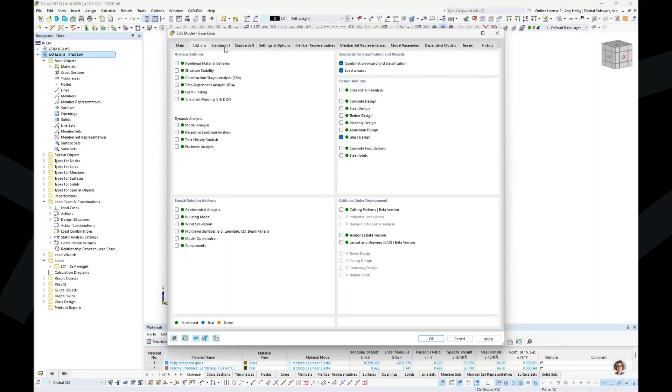Looking at our third tab here, this is where we define the standards. You'll notice the glass design is set to the ASTM E1300. We also have the German DIN standard available as well. And if you wanted to do a code-independent design, which just looks at stresses and compares them to materials, that is also possible within this add-on.

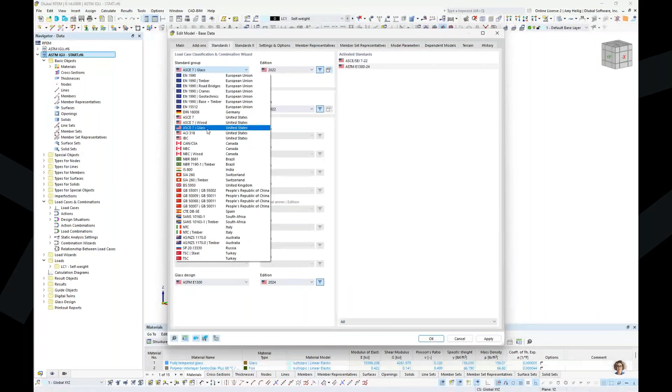When we have the ASTM selected, it is required that we generate our load combinations according to ASCE 7 glass. This is identical to ASCE 7, but we also want to specify the load duration factor for each load case, which is required in order to carry out the design according to the ASTM. That will make more sense once we get to the loading within our example today.

Now that this information has been defined, we are brought into the main program RFEM 6. You can see I have my graphical window here at the center. I have modified my drawing grid in the vertical direction, and every drawing grid point here is spaced at 1 foot. We can always right click down at the bottom to modify our grid settings.

I want to begin immediately by drawing a new surface. So we will specify a new rectangular surface up here within my quick tools. And we do need to assign a thickness to this surface, so we create a new definition type here.

The initial dropdown that's presented to me includes the glass composition. This particular thickness type is only available because I have activated the glass design add-on; without that add-on, I would not have access to this thickness. When I select this, I now will visit my second tab here where we can build up the various layers of our glass panel.

Now, to begin, I am going to start off with laminated glass. So we will start by selecting our material from our drop-down box here.

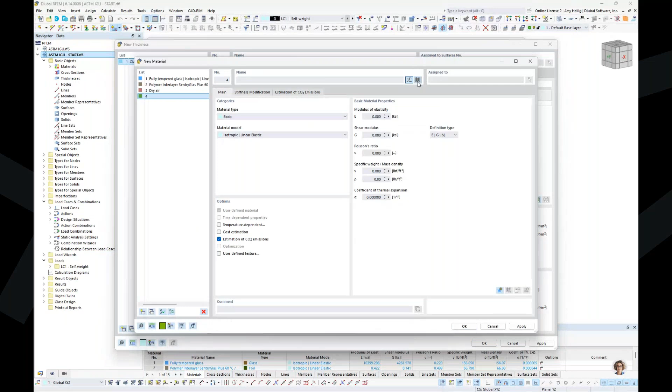Now, in this case, I already have the materials defined, but we could always visit our material library if we didn't have any materials in our program yet. Within the material library, we could set the filters over on the left to the United States. We can select here the material type, which is set to glass. And then you can see under the ASTM standard, we have 3 different glass options.

Today we'll be utilizing the fully tempered glass. In addition to this, we also have the foil types under the United States with the manufacturer SentryGlas, which again we will also be utilizing for our interlayer today.

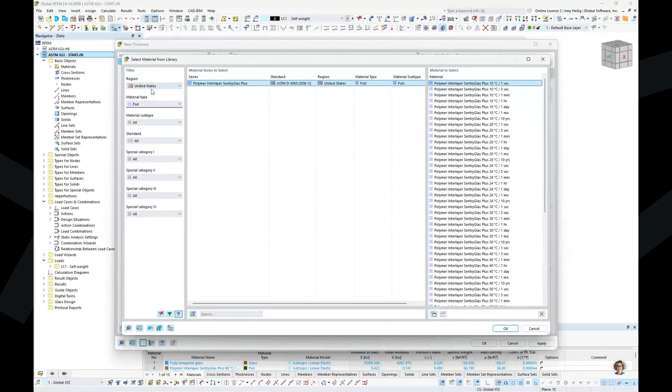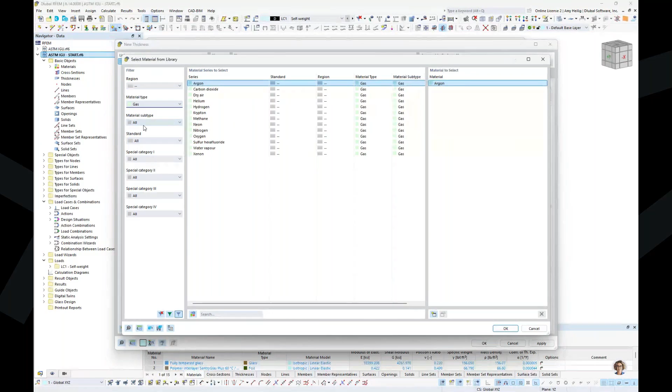If you do go ahead and clear out the region here, there are some additional options when it comes to foils that you can see selected from this list here. We will also utilize the code independent gas material type once we do get into the insulated glass panel. For this, you can see argon's available, dry air.

So likely one of these materials will already exist within our material database. But if for any reason you don't see your material there, you can always select an existing material and set this as user defined to tweak those modifications to the material values themselves.

So as mentioned, we already have these materials defined here in my model today. So for my first layer, I am going to select here the fully tempered glass, and the thickness is going to be set at 1/4 inch. I can input this in either as a fraction or a decimal.

The edge finishing is also selected here, so this is either clean cut, seamed, or polished edges. We'll go ahead and choose polished. This does influence the capacity of our glass when it does come to the ASTM design checks, so that's just something to keep in mind. That's why we are setting the edge finishing here.

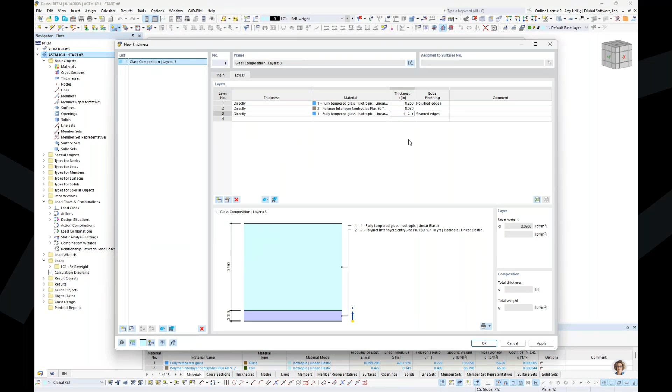The second layer is going to be that interlayer with a very small thickness of 0.03. And the final layer will be glass, yet again, of 1/4 inch and polished edges.

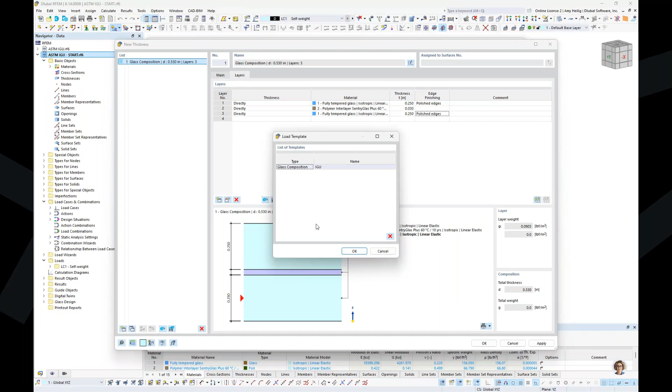Now, once we have these layers set and you're working with these quite often, you can always save them to your template library. So you can go ahead and give it a name, and then for every future RFEM model, you can have your templates available here so that you're not defining these layers each time. In this case, I only have one template defined, but you could, of course, define as many as you'd like there. That will just be a nice time saver if you're working with these same layers over and over.

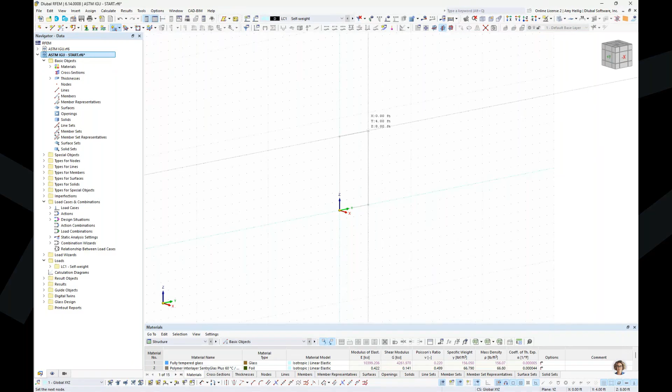So once we have defined this thickness, it is assigned to this surface, and then we can graphically draw this particular surface. So I'm going to snap at the origin point here, and I'm going to click on my second point, a width of 4 feet and a height of 8 feet.

Now, one other thing to pay careful attention to when it comes to the thickness is that when we look at the local z-axis here, we want to ensure that this is oriented properly with my surface back in the global model. In this case, this is a pretty symmetric layout, so it really won't matter in which direction this is oriented, but for unsymmetric compositions of glass, we would want to pay careful attention to that.

So now that this surface has been drawn, we want to apply some additional supports. To begin, I'm going to apply line supports to the boundary edges here of my glass panel. There are many different ways to work in the program. I can select here a new line support, or we can go ahead and apply it through the navigator on the left under types for lines. You'll see that expanded here. Utilizing my quick tools up at the top, I will create a new definition type.

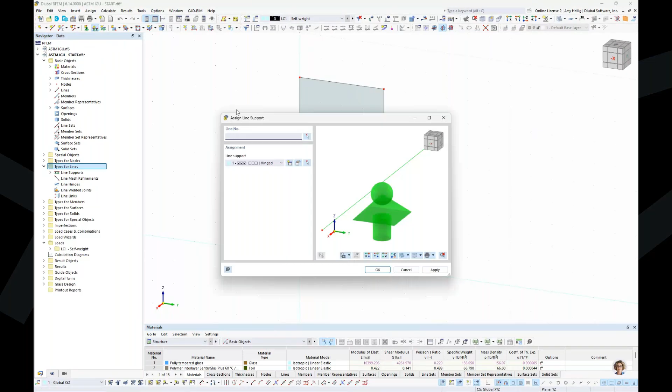And the first line support here that I want to define will be supported in the out of plane X direction only for translation. But I don't want a fully fixed support. I don't want it fully released, but somewhere in between. So we'll go ahead and specify a spring constant of 40 kips per square foot.

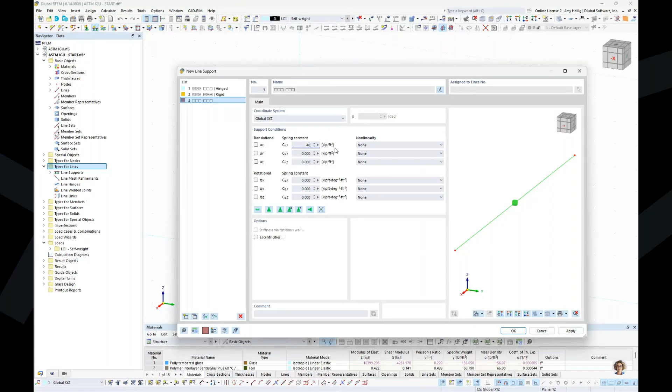I click OK, and then once I am back in this initial dialog box, I can graphically select all of my boundary line elements for this surface, and I can go ahead and click OK. So you'll notice that the line supports are now shown. If we right click, we can also take advantage of this slider to decrease or increase the size. That's true for all support options within RFEM.

We also want to apply a couple nodal supports at the base of this panel. So we'll begin first with the nodal support on the left by creating here a new nodal support definition.

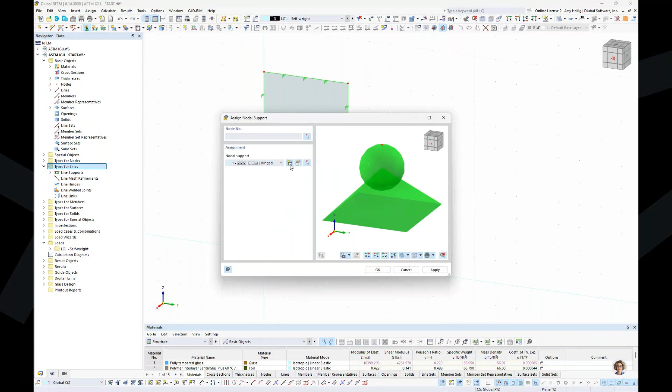I create a new definition type, and for this first entry, I want to support it in the global Y and Z directions only. So I'll go ahead and turn off the translation in the X and also the rotation here. I click OK, and then I can graphically select node number 1.

When I click OK, I have the ability to hit apply within this dialog box. So we see that nodal support applied to node number 1, but I still remain in this dialog box where I can create a second definition here.

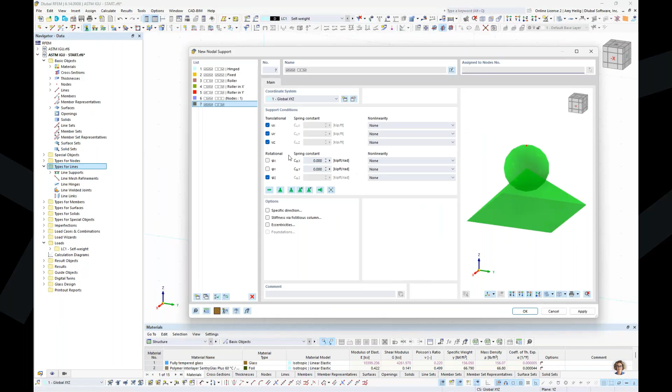And for my second nodal support on the right-hand side, this will just be supported in the vertical Z direction only. All other degrees of freedom will be released. I click OK, I'm going to graphically select node number 2, and click OK through these dialog boxes, and that second nodal support is modeled here.

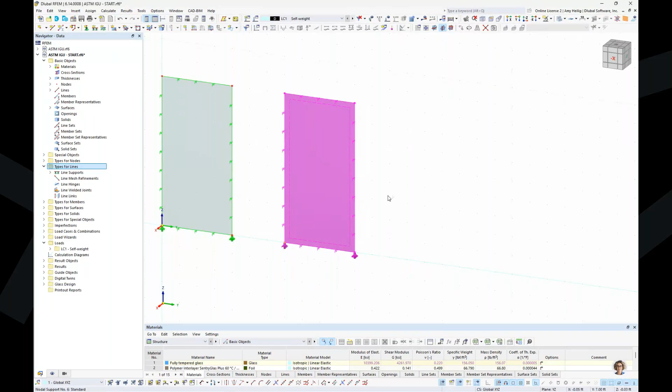So the first surface for our laminated glass panel is complete. I'm going to use my selection box to highlight all elements graphically. And when I hold down my control key on my keyboard, I have the ability to quickly make a copy for my second surface, and then do the exact same thing again a third time for my final glass panel.

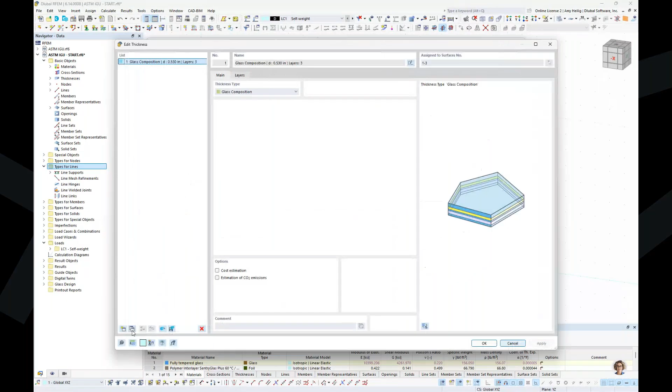Now, as we have it modeled here, all three of these panels are identical. But what we would like to do is assign different thicknesses for panels 2 and 3. So I can double click on panel 2, and again that original thickness is currently assigned. Let's go in and edit this thickness where I can make a copy of the existing laminated glass layers here.

And you might be wondering, why am I making an exact copy? This will make more sense as we move through our example today, but more or less it is going to be exactly the same as panel 1. I need to select my second thickness that I've just defined, and I click OK.

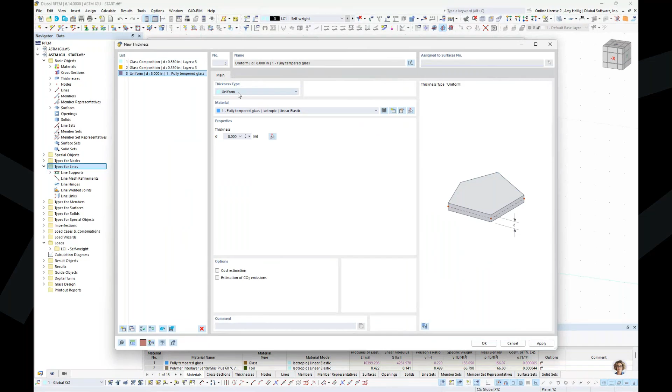We're going to do the same thing for panel number 3, where we're going to go in and edit the thickness, but this time I'm going to create a new definition. We're going to select the thickness type from the dropdown to glass composition, and under my layers tab, this is where we want to create the layers for our insulated glass unit.

So I'm going to select here my glass material. The thickness will yet again be 0.25 inches, or 1/4 inch. We will select polished edges.

The second layer is going to be that dry air material that I've already populated within the RFEM model. So this thickness is going to be 0.5 inches, and then we need to place another glass layer on the other side of our gas. This will be 0.25 inches, polished edges.

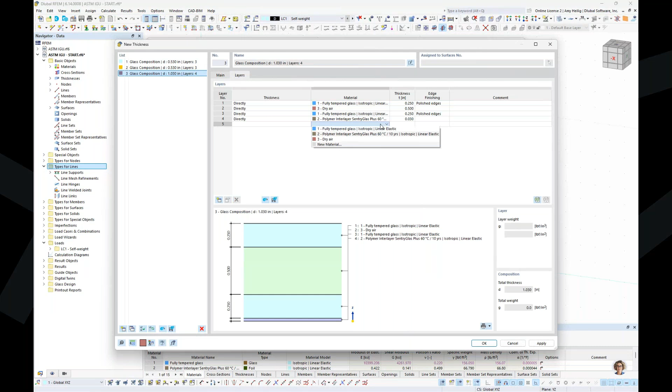And we have the ability with the layers here to not only define laminated or insulated, but also to combine the two. That's what I'm going to do for this last thickness as well, to select my interlayer at 0.03 inches, and my final and fifth layer will be glass once again at 0.25 inches with polished edges.

So you can see how it will be advantageous to take advantage of your templates and save them to your library in order to not define this over and over again. Now, this would be an instance too where we want to pay careful attention to the local Z axis since we have an unsymmetric layout here.

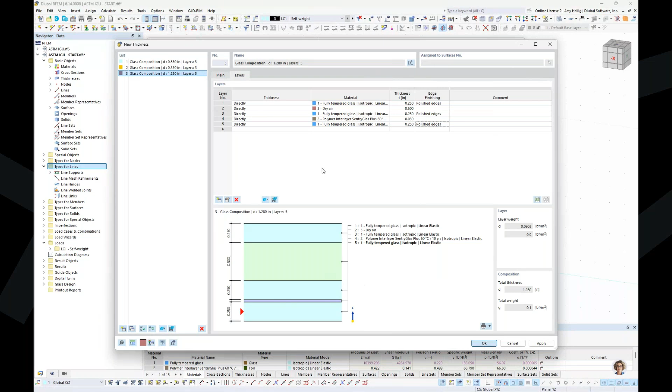So now that we have defined this third thickness type, we need to ensure that it is selected within our dropdown and assigned to panel number 3. So the modeling is essentially done for these three different types.

Remember, laminated and insulated. So I'm going to go back to the navigator on the left, and I'm going to right click to collapse all these folders. If you find all the different options a little overwhelming, you can always collapse these folders at once, which makes it a bit easier to navigate.

We'll start off with the glass design folder. Again, this is only available because that glass design add-on is enabled. And under this folder, we have the different glass composition models. So the glass compositions, I'll go ahead and edit these, are created for our glass surfaces.

A separate composition is always created for different thicknesses or different geometries. So if I had left the same thickness defined for all three of these panels and all three geometries identical, then I would see only one composition. But in this case, remember, I have three different thicknesses defined, even though the geometry is the same. So therefore, I have three different composition models.

Now we'll go through this in detail. Starting off with the first composition here assigned to our first surface, we want to set the modeling type to a surface model. We're going to get into more detail with this in just a minute, but this is also where we are going to set either coupled or uncoupled for our shear coupling between those layers.

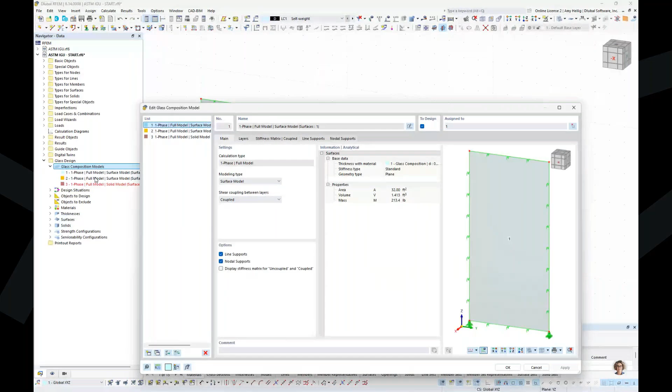The second composition is assigned to panel number 2 here. Remember, this is identical to the first one, but for this case, I'm going to set the modeling type to a solid model, and I'll go ahead and click apply. What we will see here is that for the second composition, the reason why it turned red is because the program says, hey, wait a minute, we need to go ahead and orient the local axes of the lines if we're going to generate these solid elements. So we have a quick option here just to tell the program to go ahead and do so.

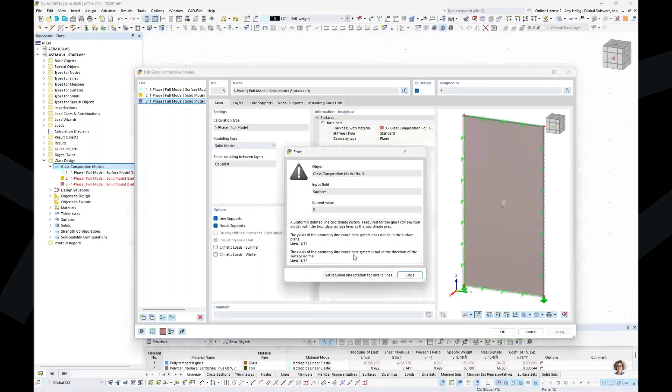Now the third composition here is going to be assigned to our third panel, and this will also be a solid model. So for any one of these particular solid models, we'll ensure that the rotation is set. We should be able to click OK, and then now we see all three of those compositions look okay.

So let us talk a little bit more about the surface versus solid model here, as well as shear coupling. And we'll go ahead and refer back to the PowerPoint.

With the surface model, this essentially is a 2D object in RFEM, which is an FEA program. We're going to keep that glass panel as a two-dimensional element, but we have two different options here when it comes to shear coupling. The first is a 2D element, a surface model with rigid shear coupling. This is essentially where all of our layers are rigidly connected together, so therefore we're going to get rigid shear transfer between each one of those layers.

Now the alternative option with a 2D surface model is to have essentially an uncoupled option where we have free shear coupling. The layers are allowed to slide independently, and we're not going to have any shear transfer between those glass panels or those glass surfaces to the interlayer surfaces. So those are the two different options here when it comes to that surface model, either fully rigid or fully released.

Now alternatively we have the 3D solid model. So we're now introducing this third dimension, this solid object, into this FEA program for our glass structure. And for this, we will actually consider the true shear coupling between each layer. The interlayer, such as our foil or our resin, the material properties will be accurately considered for accurate shear transfer between the glass to the foil or resin, and then also to the glass as well.

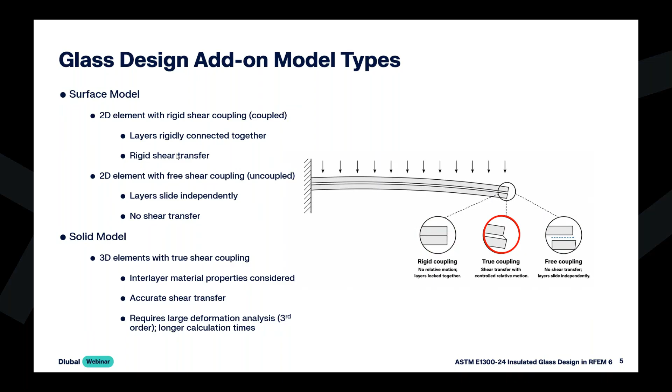And we begin with first single layer glass. So this is obviously the simplest composition, we just have a single glass layer. And for this, in most cases, probably a 2D surface would be completely sufficient because we don't really have to worry about that shear coupling with only one layer. However, if we are starting to see the thickness over length ratio greater than 0.05, then that plate theory is no longer valid and we need to move to solid elements, so three-dimensional objects here.

So therefore, solids are recommended for thick plates. And this is really true for all glass structure types, whether it's single layer or laminated. We would recommend moving to a solid if that thickness starts to really increase in comparison to the length of our panel. The second type is laminated glass, so this is essentially where we have two or more glass panes with this interlayer, this foil or resin. And for this, either 2D or 3D is possible.

Keep in mind with the 2D model, as we discussed on the previous slide, it is either fully rigid shear coupling or fully released. It certainly could be possible that you run this 2D surface model without shear coupling for long-term loads where the shear resistance of that interlayer should not be considered.

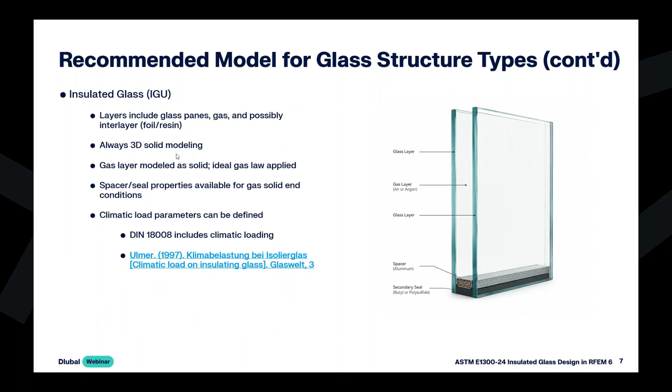Okay, so what we'll do now is go back into RFEM to, again, take a little bit of a detailed look at these compositions. Now that we understand the surface versus solid model in a little bit more detail, we're looking at this composition number 1 here for our laminated glass that is set to a surface model, so a two-dimensional object.

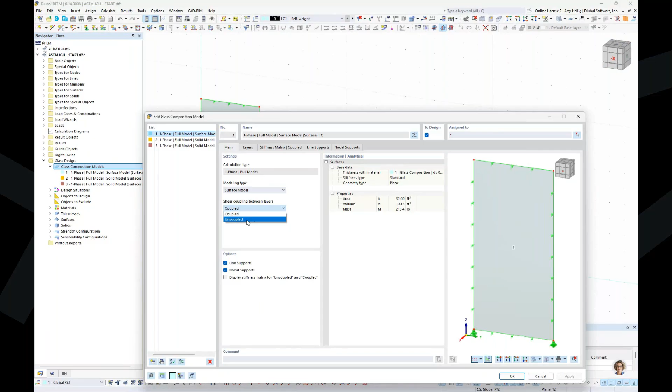We can select here whether it is rigid shear coupling or completely uncoupled and free. For this one, I'll go ahead and leave this as coupled.

The second tab just reiterates the layers that I've already defined within the thickness. Not too much to discuss here, but you will know that each layer has its own stiffness properties. So we're going to utilize the laminate theory to then calculate the global stiffness matrix here of the panel, the global panel itself, back in RFEM.

This is really powerful in the sense that the program's automatically considering all of those layers. We can also display here, in full transparency, what that stiffness matrix is, whether it's coupled or uncoupled.

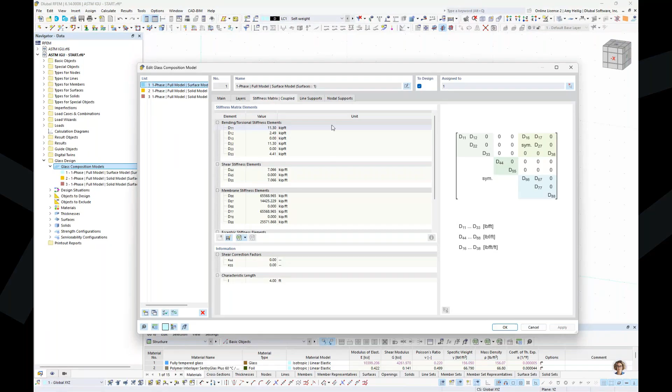Now, these supports are also given to us here. So we have our line supports, again just reiterating that those out of plane line supports are applied at all four boundary edges, and also the nodal supports - we have our nodal support on the left and the nodal support on the right.

So now that we have covered this first composition, we'll move on to the second. Remember, this is identical to the first, but I did modify it here to a solid model because I thought it might be interesting. Let's compare a 2D surface option to a 3D solid to see how our results differ between the two.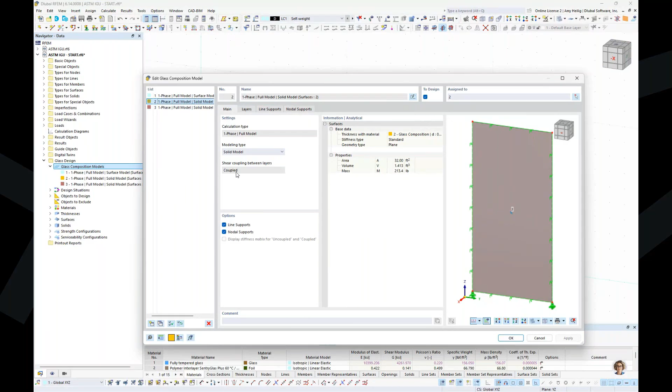When we have this set to a solid model, we do not set any shear coupling because this is automatically considered within the calculation itself according to third order analysis, where we will account for the true shear coupling between those layers. Under the second tab, again just reiterating those layers, but now that we have moved to a 3D solid, there is a difference here - we need to set what we call the reference plane.

You can see this dark line indicated here graphically is currently set to the top of layer number 1. I'm going to toggle this down to the bottom of layer number 3, and we see that update graphically.

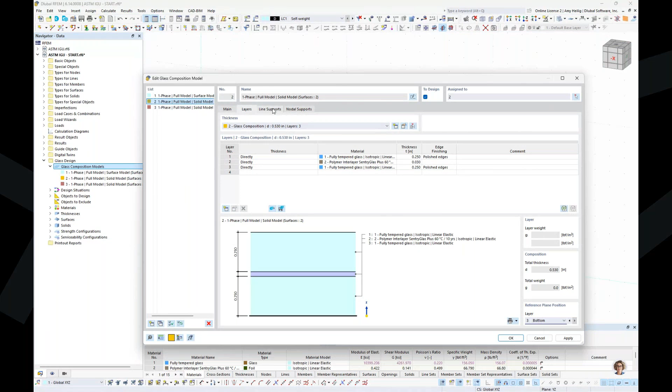The point of the reference plane is: where do we want, by default, all loads applied to this three-dimensional object? And where do we want all supports applied by default? We always have the ability to modify these placements, which we'll be doing in our example today. But we just need some reference point or reference plane in order to initially apply the loads and supports.

Under this third tab, line supports—again, just reiterating, these are line supports at the boundary edges. Because we've moved to the solid model, we now have a little more control over where we're placing these supports. For this line support, if I do absolutely nothing here, it's going to be applied to that reference plane, which is the bottom of layer number 3. So we'll go ahead and leave that for our line supports.

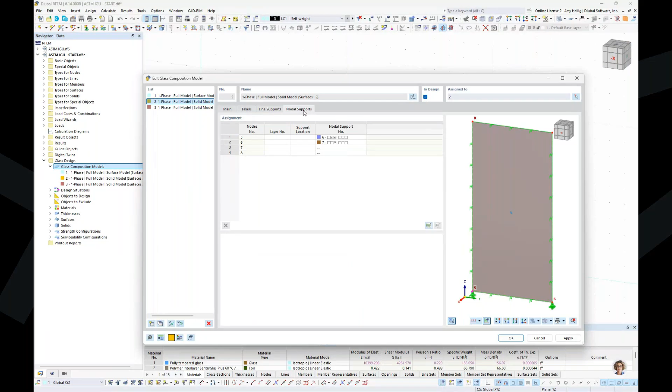Looking at the nodal supports, this is where I can toggle to the cross-section view. I'm going to tell the program to apply the nodal supports at layers 1 and 3—those are our glass layers—and we want to apply it at the middle. Now we see this update graphically: that nodal support right there in the middle of those 3D glass solids.

Same thing for my support on the right-hand side—we'll go ahead and toggle this to the middle. So you can see how we have a little more control over the support placement when we've moved to this three-dimensional object.

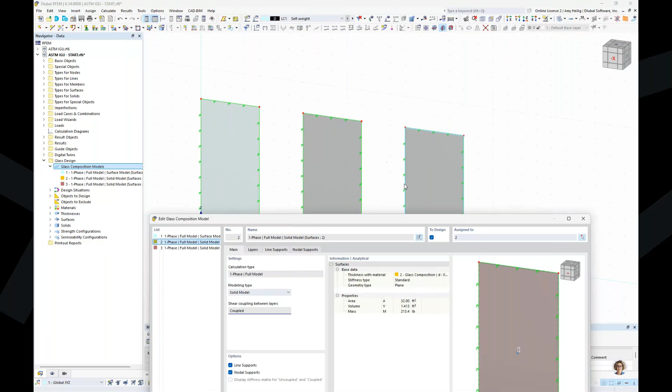We're now going to take a look at our third composition for our third panel. The program has automatically detected that this has a gas layer, so we have no choice here to choose a 2D surface element—only a solid model is available to me. And shear coupling, same thing: we can't choose any option here because true shear coupling will be considered within the calculation.

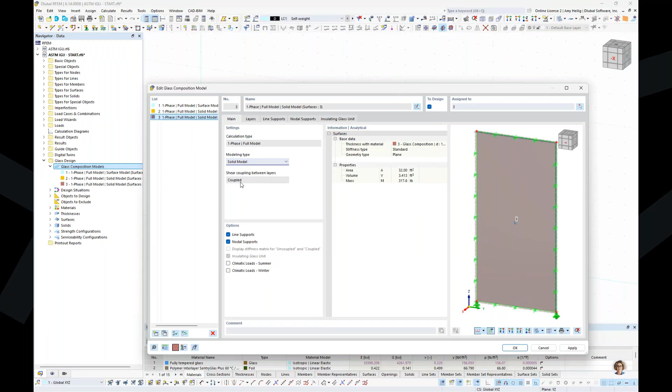Under the layers, I will toggle the reference plane here to the bottom of layer number 5. Looking at the line supports, I do want to make some adjustments. I'm looking at a cross-section view of our different layers, and within all of my line supports I'm going to apply this to layers 1, 3, and 5 at the middle. Now we see that line support adjusted directly to each one of those glass solids.

I'm going to do the same thing for each one of the boundary lines here by selecting layers 1, 3, and 5 within my dropdown, one more time for my final layer. A nice trick here: if I hit the down arrow key and F8, that will copy that input setting to all of my additional rows. So now those are all set to the middle for our glass layers.

The nodal supports, we want to make some modifications here. For my line supports, I'm going to go back and change this to only layers number 1 and 5, so I don't want to apply it to that middle layer. We'll make that modification here and for our last one. Good—so as you can see here, only the external glass solids.

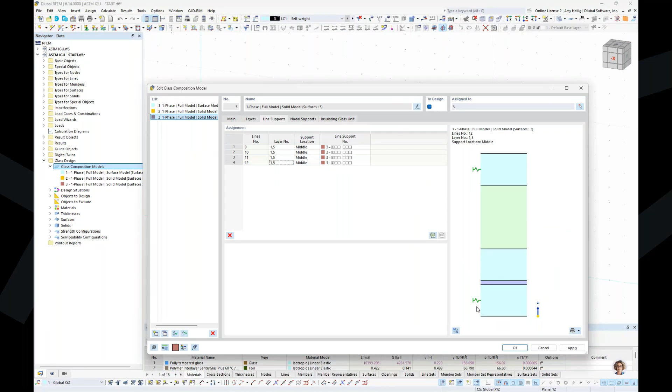Now, under the nodal support, this is where I do want to apply it to all three layers—1, 3, and 5—the support location will be the middle. We have only one other nodal support where I do want to apply it at all three locations. So there we go: two layers for our line support, and our nodal supports will be all three located in the middle. Now, the final tab here is specific to our insulated glass unit, and this is where we can specify our spacer.

You'll notice by default everything is deactivated here. So let us go to the PowerPoint to discuss this in more detail. This dialog box allows us to not activate any spacer.

Now, going back to our model today, we're going to go ahead and leave this deactivated. So again, we're going to apply this side support internally, and the program will create this very soft material. Everything will be done automatically. But if you want to modify that, you can always activate it here and define a thickness and material.

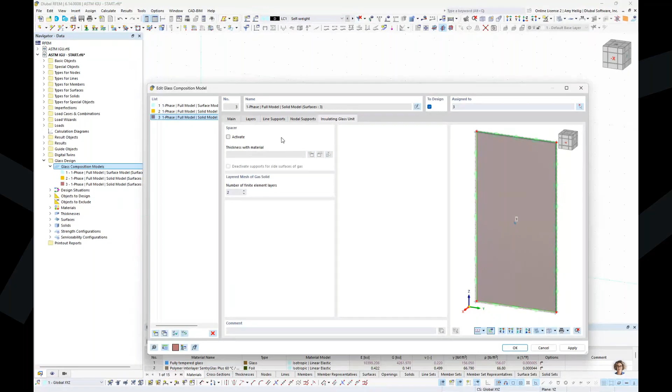So now that this information is defined for all three compositions, let us go back into RFEM to take a look at what the program has automatically modeled for us. When I expand my basic objects here, you'll notice under the solids, I have some automatically generated solids that include my glass, the gas, and also that inner layer.

If I expand out the surfaces, we can see all the surfaces that were also created automatically by the program, denoted by that purple color. When I'm looking graphically here at the model, these just still look like two-dimensional objects to me. So what we would want to do is take advantage of this button in the upper right-hand corner to display the glass composition model.

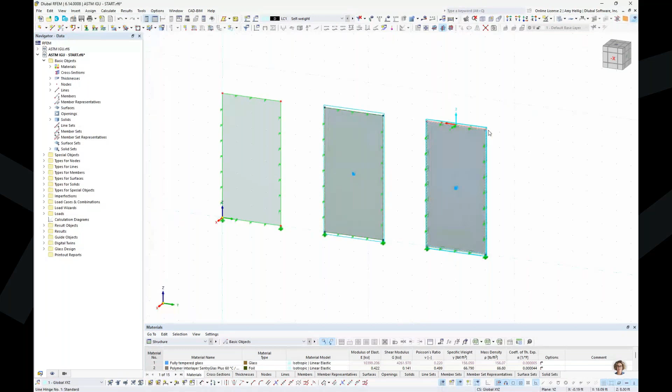This is also available here in our dropdown under the View tab at the very bottom, to display the glass composition model. When I activate this, you'll see that this first surface is again still a two-dimensional object, that's what we have set. But this second panel here is now solid elements. We can view this by zooming in quite a bit to see in more detail.

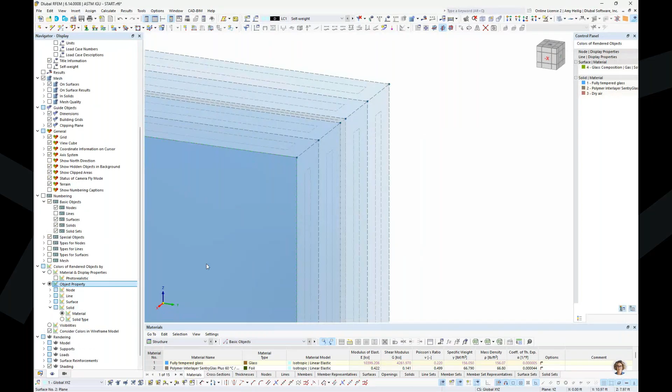In addition to this, I'm going to go ahead and modify my colors for my solid based on the material type, and we'll go to a solid rendered view. So we have our glass solids in the back, we have our inner layer foil resin layer in between, and then we have our glass solids up front.

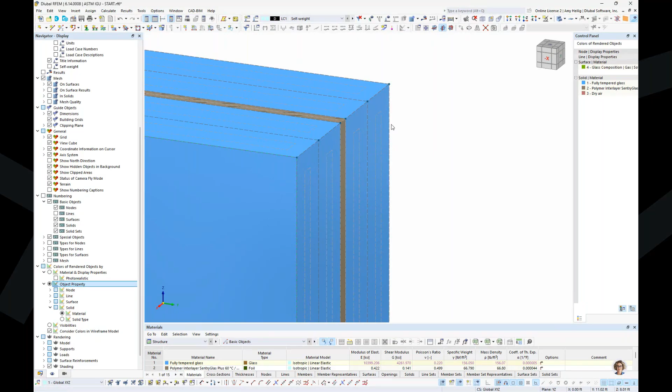And you might be wondering, why are there two glass solids? The reason is because we allow you to place the boundary conditions, the supports, at the midpoint of the solid. So in order to do so, we had to split this up into two separate solids, but the total thickness is still 1/4 of an inch thick. So that's a little bit more about what's going on, and it might be interesting to compare this 3D solid to the 2D surface here.

Now, looking at our insulated glass unit, as we zoom in, the first thing we notice is that this is a little overwhelming with these line hinges. We can right click here to significantly decrease the size of those. Also, here's those side supports that we talked about in the PowerPoint. We can decrease the size of those as well.

So we zoom in here and we have our glass solids in the back, our gas solid shown here in green, an additional glass solid layer here, inner layer, and additional glass solids. So everything is created automatically by the program, we don't have to manually create these solids.

I will say, though, that it is entirely possible, if you don't want to use this simplified surface-into-3D-solid option, you can manually create a solid and assign it as a glass, a gas, or an inner layer.

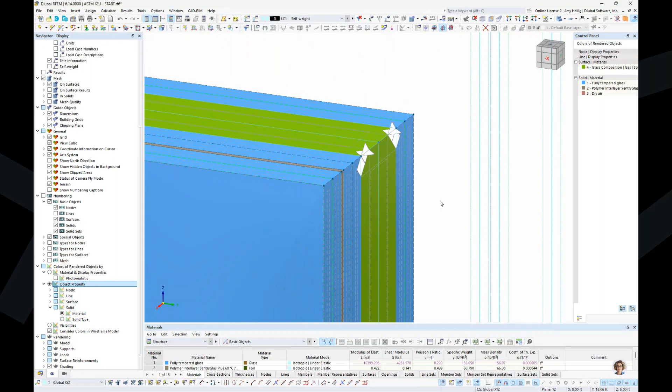This is also possible, but certainly taking advantage of the program's modeling abilities will be very efficient. So now that we have taken a look at all of these elements, it should also be known that all the supports are shown here. Again, this 3D solid allows us to get very detailed with our support locations.

We don't have any members in today's example, but I can always come up here and draw a new beam member, such as an aluminum mullion, and assign it to the line elements of our solid. So we could model the entire supporting structure along with the glass panel all in one model. That initial webinar that I linked at the beginning of this PowerPoint does include some additional members being designed with the glass panel, so you can certainly refer to that.

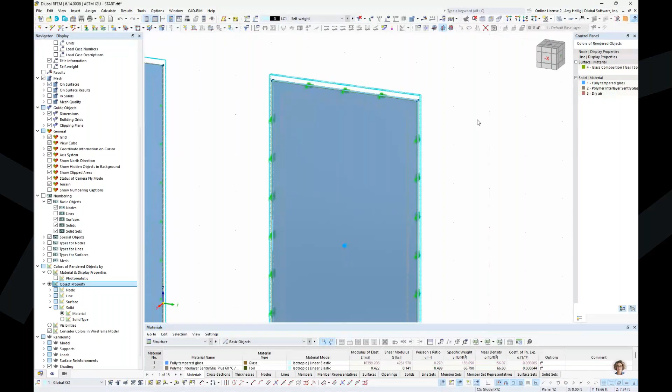Let us quickly take a look at the FE mesh as well. Here in our dropdown, we have the mesh settings. By default, this is set to 1 foot. We probably want to decrease this to something maybe like 0.33 feet. If I click OK and apply, we can quickly generate the mesh just to take a look at what this looks like within the model.

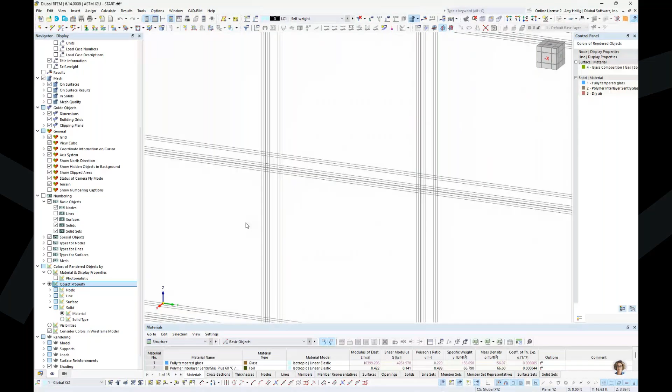As you can see here, our 2D surface element still remains as a two-dimensional object, but our solid elements now have a thickness that is accounted for with this FEA analysis. Maybe the most interesting one is to zoom in here for our insulated glass unit, where we see the FE mesh layered throughout the thickness in the global X direction as well. So we can turn off the display of our mesh.

The next thing to move on to is loading. So for our load cases and combinations, I'm going to open up that dialog box within RFEM. Remember, we are generating the load combinations automatically according to ASCE 7 with this glass option activated. When the combination wizard is checked on here, we automatically generate the load combinations. You can always uncheck this if you prefer to manually create those load combinations instead.

Under the load cases, I am going to rename this default load case to dead load. The self weight is automatically accounted for here, and the action category is set to dead load. Notice that the load duration is also set within this dropdown. So we have some assumptions every time you create a new load case, but you have full control to modify the load duration. Again, this is needed to carry out the ASTM design checks as it does affect capacity.

So our second load case, we'll go down here in the lower left to create a new load case definition. This is going to be wind load, and the action category will be set to wind. Notice the load duration updates here. We'll create a third load case. This will be live load with the action category set to live.

My fourth load case will be a bit unique here. This one is going to be set to a self-straining force, variable type. This is going to be for my climatic loading for summer and winter for my insulated glass unit. I am going to modify the load duration here to 3 months, and we want to give it a name. We'll start off with altitude for summer.

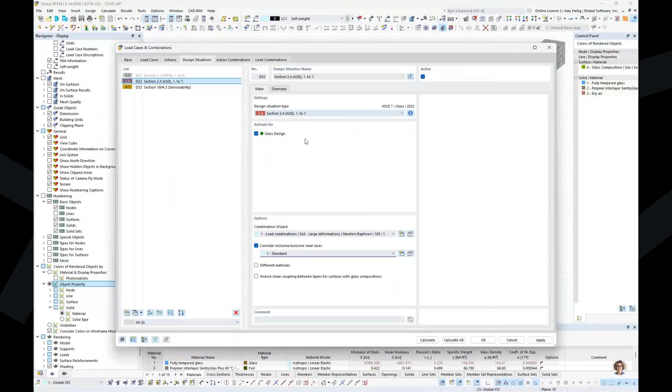So when I click OK and jump to the load combinations tab, this looks quite a bit better. We should see only these summer loads acting along with dead, live, and wind, or winter loads, but never summer and winter together. Now scrolling down to my IBC load combinations, climatic loads are not considered here, only live, wind, and dead, so we don't need to worry about that for this particular design situation.

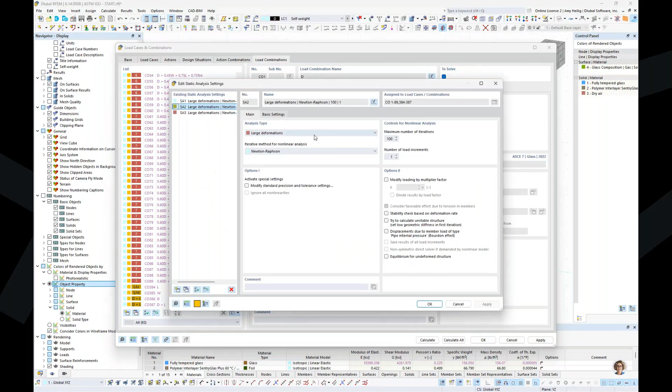Now, you will notice that everything is run according to a large deformation analysis. We have enabled that solid model for the glass calculation, including that gas layer. So inevitably, we have to run a third order analysis. That's the only option available to us here within the program.

So now that the load cases have been defined, we need to actually apply the loads to the structure. So we can use our drop down box here, and for the dead load case, I'm just going to leave this as self weight. No additional loads will be applied.

But for wind load, we want to apply a wind pressure to each one of these surfaces. So we'll go ahead and apply a new surface load. But before I do, I'm going to turn this back to the simplified view, so again this just looks like three simple surfaces for all three of these glass models. Creating a new surface load, I want the load direction to be in the global x-axis. The load magnitude here is going to be negative 0.03, and I am going to assign it to all three surfaces. So I click OK, and now we see that wind pressure applied.

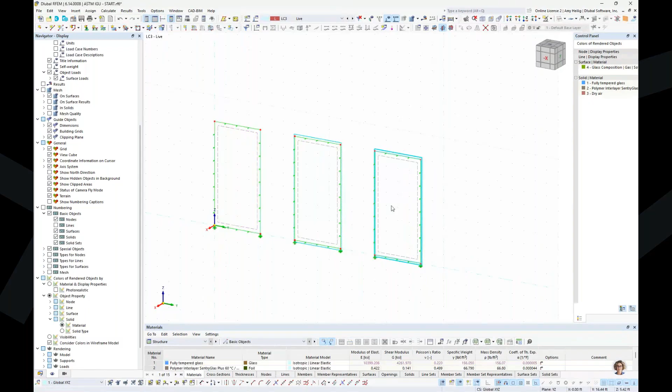So looking now at our live load, I do want to apply just a simple handrail line load to the third panel. I won't apply any live load to the first two. So for this, we can take advantage of our free line load. These different free loads allow us to apply loads to different parts of a surface or a solid element without applying it to the entire element itself.

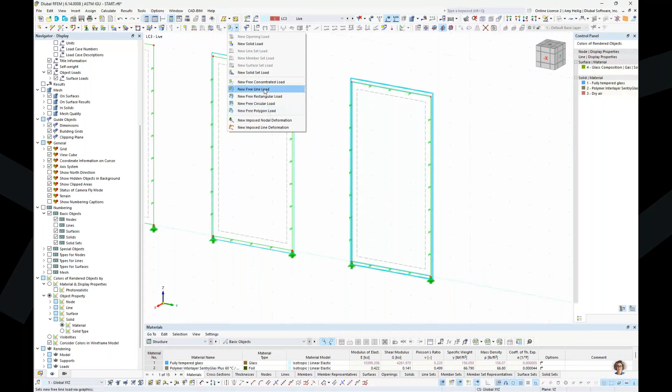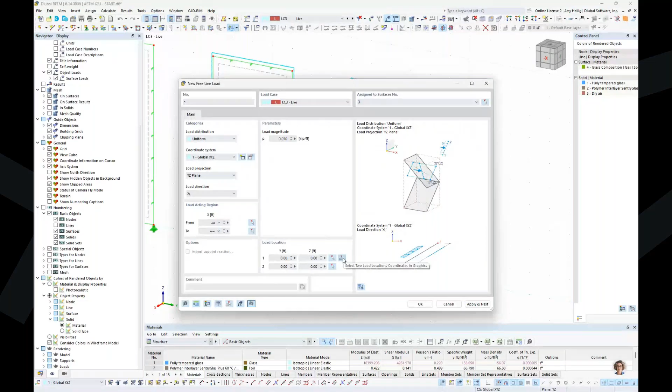So we start with this new free line load, and in this case, we want to apply it in the global YZ plane in the load direction of global X. The load magnitude will be 0.07 kip per foot, and it will be applied to our simplified surface number 3. Then I just need to select 2 points to apply this line load. So I'm going to snap to a point 3 feet from the base of my panel, and snap to the other side of the panel for point number 2. You can see the coordinate points are populated here. I click OK, and now we see that live load applied to this panel.

Now, if I turn this into the detailed solid view, if you remember, I talked about that reference plane. When I double click on this live load, remember it's applied to surface number 3. I scroll in here and notice that surface number 3 is on the wrong side of the panel. This is because that's the reference plane that we talked about. By default, all loads are automatically applied to this reference plane, but I need the load to be applied to the inside of the glass panel. So it's very easy to modify this. I can clear out my selection, and instead select here surface number 65, and click OK. So it's important that we have the correct loads acting at the correct location.

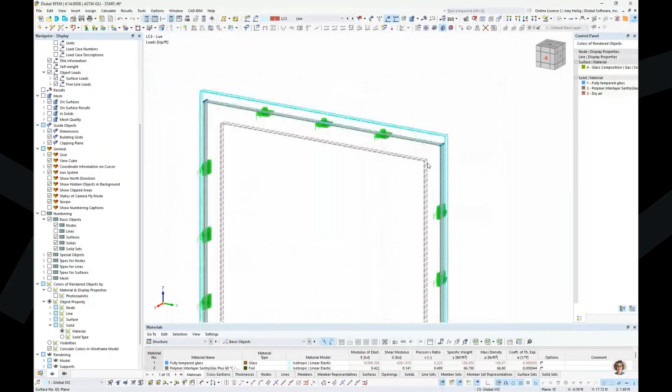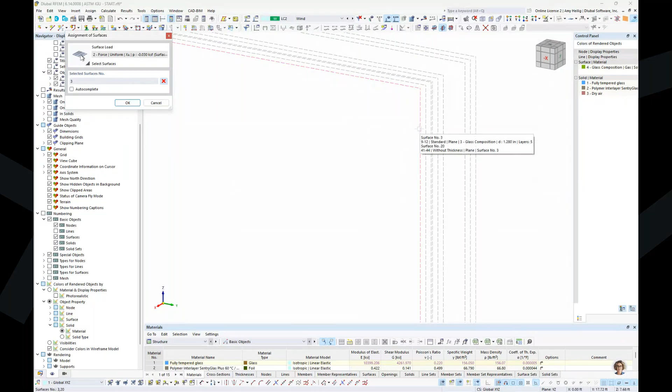If we take a step back and look at our wind load and I double click here, I take a look at where it's being applied, this particular surface, surface number 3. In this case, that's fine. Our reference plane also corresponds with this outer surface here of the 3D solid, so we ensure that that wind load is applied at the correct location. No changes are needed here.

The final thing to do is to apply our climatic loading. So we're going to go back here to our glass compositions. We can right click to edit these, and we want to jump to glass composition number 3, which is the one with our gas layer.

I have already defined the load cases in my load cases and combinations dialog box, so I can simply select them from my dropdown. We're going to assign load case 4 to altitude, load case 5 to temperature, and load case 6 to atmospheric pressure, all for summer. I'm just going to leave all of these values as default for now, but of course you would want to make the necessary changes for your project design.

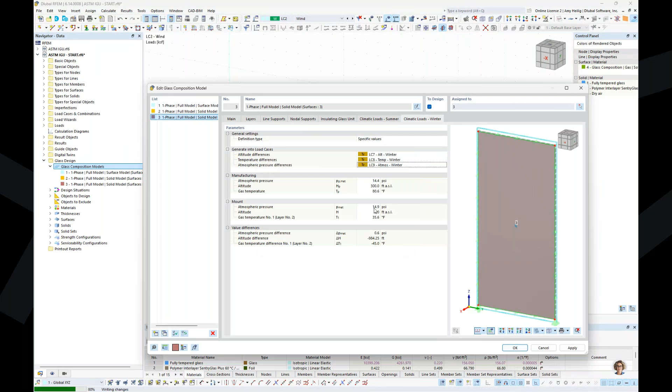When this information is set, I click OK, and the program will apply these loads directly to my surface. If I take a look at my summer loads, it's only applicable to my insulated glass unit, but we have a pressure shown for altitude differences. We have a solid load for our temperature climatic loading, applied directly to the solid element itself rather than a pressure applied to the surface objects. And finally, we have our atmospheric pressure differences shown here graphically as well.

So when I toggle down to one of the load combinations that includes all of these, you can see them all graphically displayed. We have our wind loads, our live loads, and our atmospheric pressures all considered graphically here.

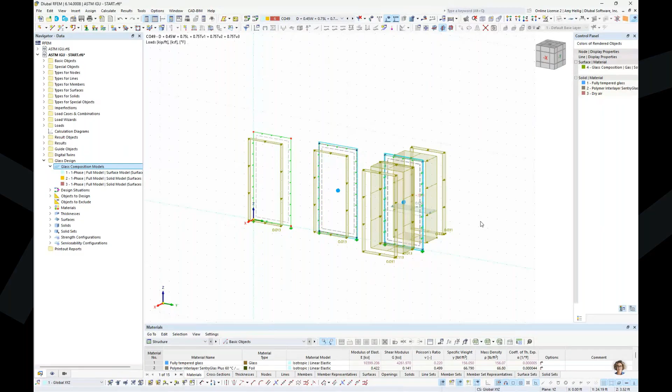So we're now ready to move into the design. What we want to do here is turn this back to the simplified view. I'm going to select all 3 surfaces, and I can double click on these surfaces to edit them.

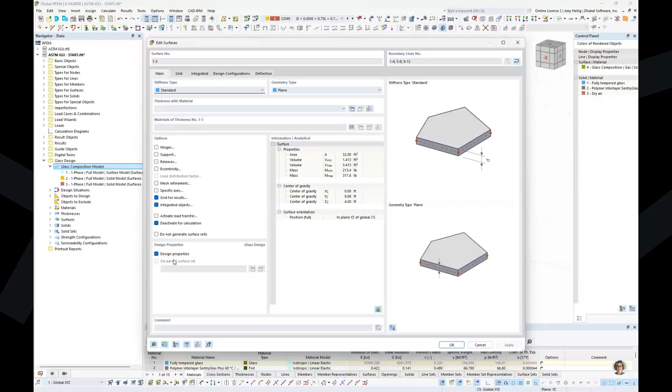You'll notice that the design properties is activated down here at the bottom. This just means that not only do I want to carry out the analysis, but also the ASTM design checks within the glass design add-on. If I only wanted analysis, I could uncheck this here.

We have the design configurations tab available, and here is where we set our strength configurations for all three of these panels. For this, we are going to check the principal tensile stresses, sigma 1. We also set here the probability of breakage. We can check allowable edge stresses according to the ASTM standard, and this is true for both surfaces and solids. This is information that I go into much more detail in the previous webinar, so refer to that webinar if you want to revisit this in more detail.

One thing to notice though, under the solids we have our surfaces solid model. That's what we're utilizing today, where we're drawing this simplified surface, but the program is generating all of these solid objects automatically for us. The other option you see here is just solids, which is for manually created solids, which we don't have any in our example today. You have the ability to create three-dimensional solid objects and assign them as a glass or gas material. In this case, we cannot check edge stresses, simply a limitation of the program because we don't know the geometry of the solid, but edge stresses will be checked for any solids automatically created by the program.

The serviceability configuration is where we set our limiting deflection ratios.

L over 175 is set here for panels supported at both edges, and also L over 50 for cantilevers. Same concept applies for solids, so you can go ahead and modify that as you see fit.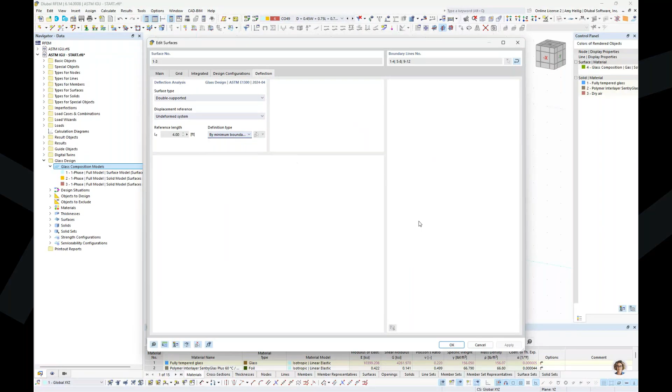Now that all of this information has been verified, we jump down to the glass design add-on, where we have our design situations listed: our LRFD and ASD load combinations will be set to strength limit state and the serviceability design situation will be set to serviceability limit state. So we can click the show results button here to begin our calculation.

This does take just a minute, so I will simply toggle over to an already saved model where the calculation was carried out. When the calculation is done, we see here the results for both the static analysis and the glass design. Let's take a look first at the static analysis.

We can cycle through the different global deformations here for any of the load combinations and see how this graphically updates for each one of our panels.

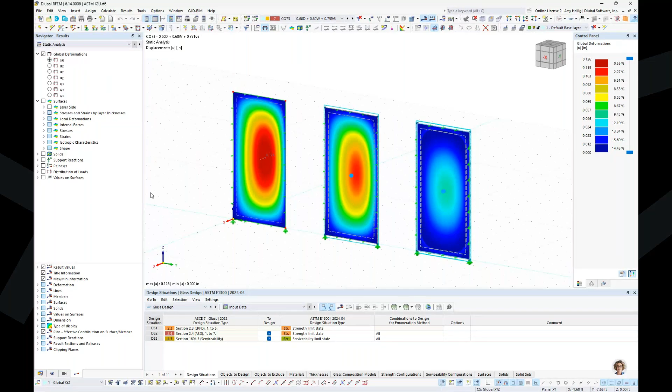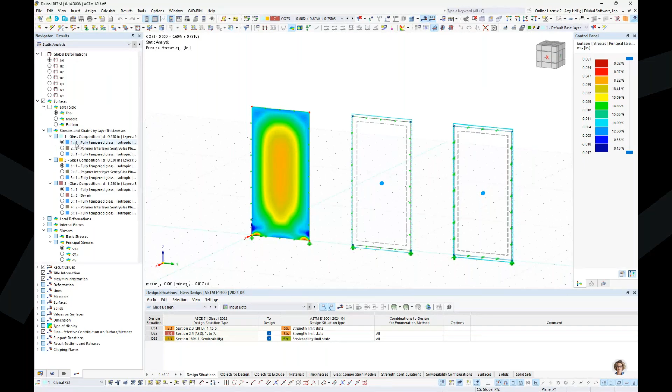We also can view the surface stresses. In this case, we only have one two-dimensional surface object - remember, that's laminated glass. So we can view the stresses here for the principal stresses, sigma 1. What's really cool is that I can expand this to view the stresses for layer number 1 or layer number 3, and furthermore specify which layer side: top, middle, or bottom. So there's a lot of control here over the stress visualization for that two-dimensional surface object.

In a similar manner, we also have our stresses for our solid, and we're probably interested also in principal stresses sigma 1. We can flip this around as we'd expect - we have higher tensile stresses, likely due to that wind loading or some of those climatic loads, on the inside of our glass panel.

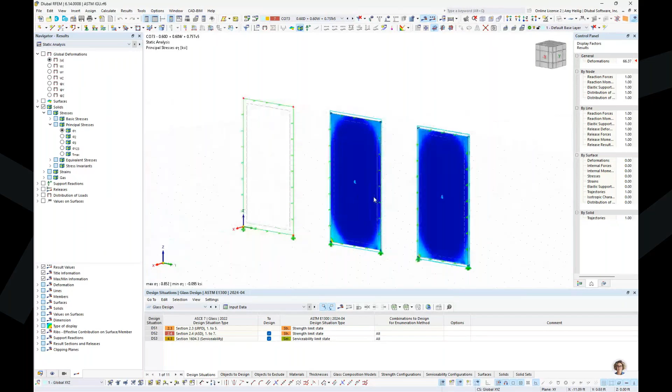So you can create different visibilities by different solids to view those stresses. We also have the ability to view the gas pressures, so I can go ahead and activate that. We only have one solid that is a gas material, and we can see the relevant pressure here in PSI. And then, of course, all of our reactions are also available to us graphically.

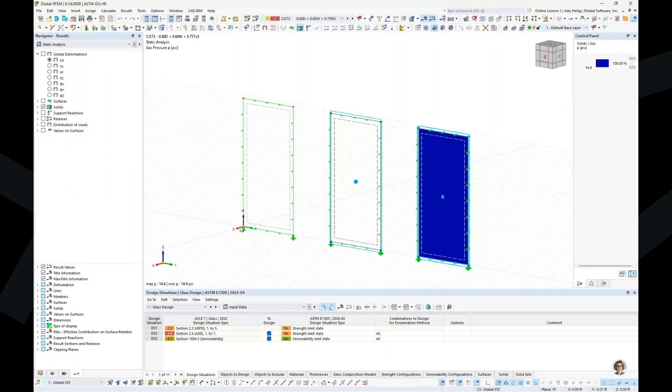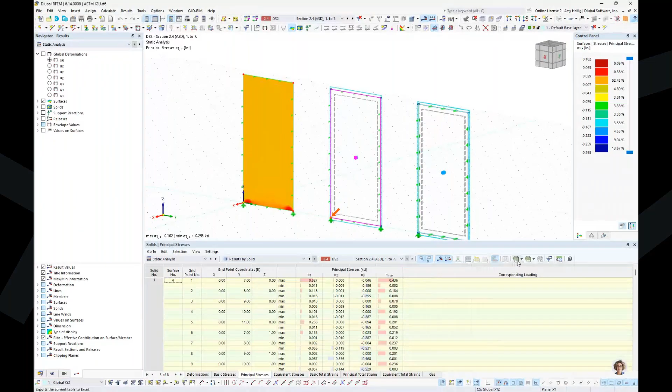All of this information is shown in table format as well. So we can jump here to the static analysis if we're interested to view the information by surface or by solid. Perhaps we jump to the solid, maybe looking at the principal stresses. We can export this out to Microsoft Excel at the click of a button for further sorting capabilities. So not only is everything shown graphically, but of course also in table format.

Now we want to toggle to the glass design results. We've taken the static analysis and now we're applying the ASTM code design checks for each one of these elements. When you are done running the calculation, you may get some different warnings here.

And these warnings are pretty self-explanatory in the sense that, hey, we can't design a gas solid type, or we can't design the interlayer solid types. That's totally fine - we're only designing the glass solid type. So that's just what these errors are referring to.

Then we can toggle here to the design ratios on surfaces or solids. We'll begin first with the surface element, and we can maybe turn off the display of the solids. So again, we have this first laminated surface. We are getting results here for our principal tensile stresses as well as our serviceability checks, and in this case serviceability is controlling with a design ratio of 0.76.

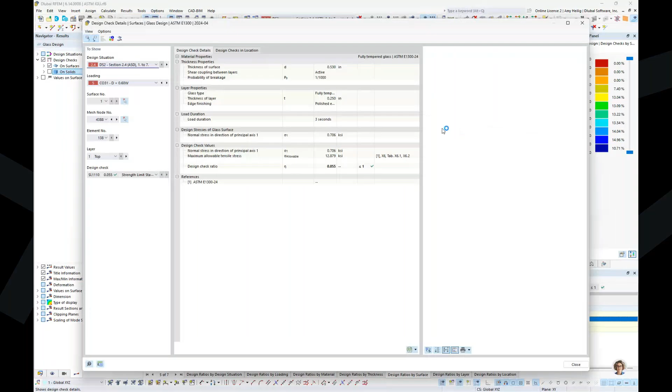But maybe looking at the design check details for the principal tensile stresses, we can zoom in here and see what is the demand stress from the analysis versus the allowable stress from the ASTM code. So depending on where we're at with this particular panel, we might be checking edge stresses around the edges, or just general allowable stress towards the center of the panel. So toggling now to the design ratios on the solids, we can take a look at the design ratios of each one of these solids.

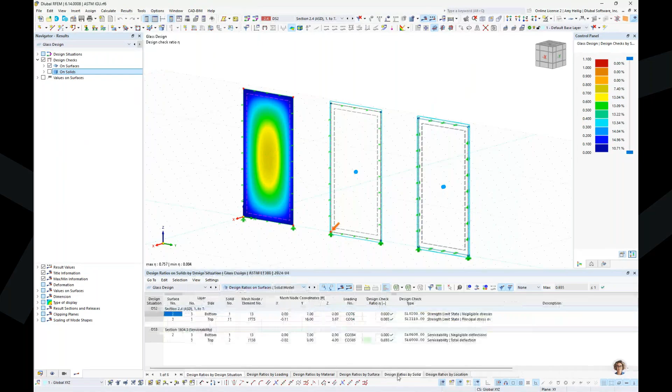We can go ahead and update them graphically, shown here too. By the way, you can view the values on the surfaces here. So this is currently set to show each value at every FE mesh point.

When we take a look at the design ratios by solid, you'll notice that we're checking those principal stresses, sigma 1. We're also checking deflections, very similar to the surface element. And what else is cool is that in addition to the design check details, we can view the results diagram here, kind of looking at a cross-section view.

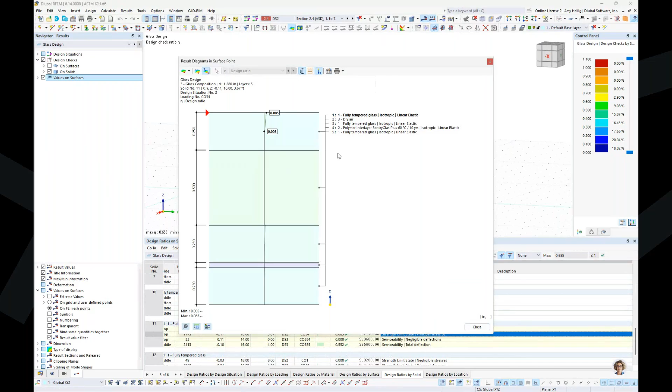I'm going to toggle down to maybe one of my insulated glass because this might be a little bit more interesting for us. So again, we have that glass layer, that gas layer, and then glass, interlayer, glass.

So we can use our drop down here to view the stresses. These are going to be sigma 1, those tensile stresses, as a cross-section view at this particular point here where that red arrow is pointing to. You can also toggle here to the shear stresses.

Again, we're accounting for the true shear coupling behavior between each one of these elements when we have moved to this 3D solid object. In turn, if we were to look at this shear transfer for the 2D surface, we would see either rigid coupling or fully released. So that is just a general overview of the differences between laminated insulated glass.

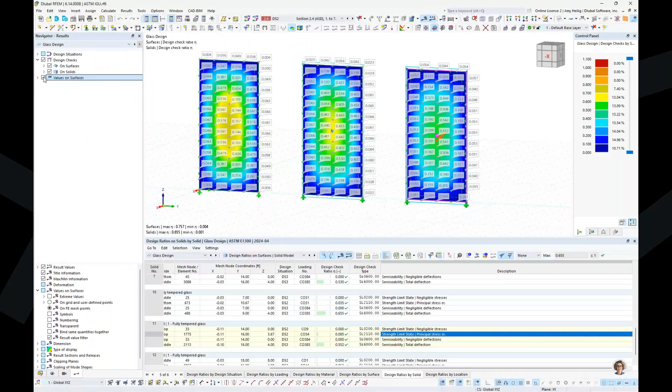Especially this new solid type within RFEM 6 that we would always use for insulated glass. But again, we could also utilize a solid for laminated glass, which you could kind of compare the results here for a 2D surface versus the 3D solid for the exact same thickness types.